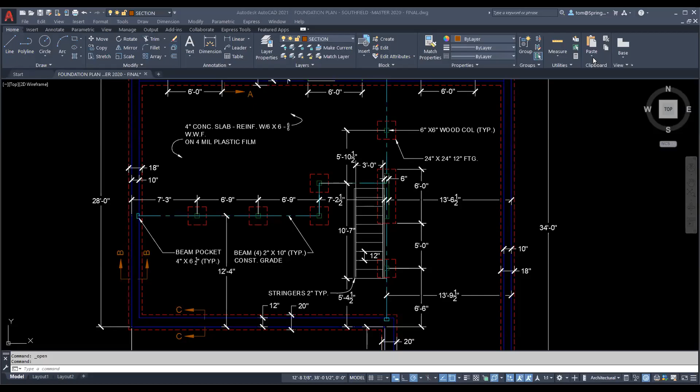Okay, can you guys all see this foundation plan here? Yeah, I see it. Okay, good, good, good. Alright.

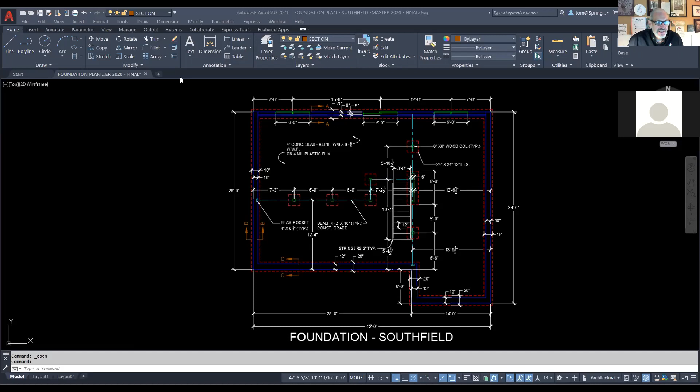How's your week been, Alex? It's been pretty good, how about you? Yeah good, I'm glad it's been good. Mine's been good, had a good week. Actually, we just finally finished closing on our building up north. So that's all good, we got all that happening, and that's a great thing.

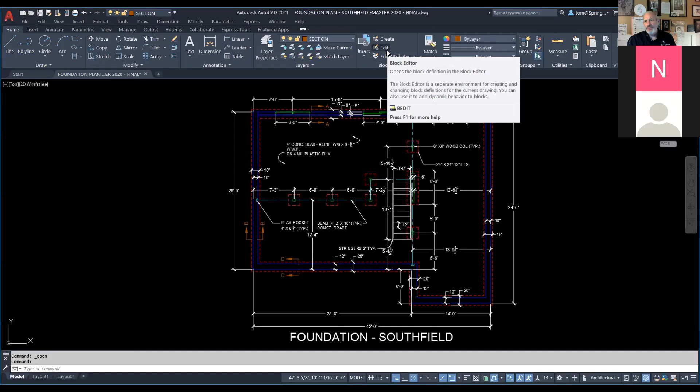Oh, is that the one in Clayton? Up in Clayton, yeah, that's a good thing. And so we got that all done, and it doesn't belong to us anymore. It's been the first time in like 16, 17 years I haven't had all that pressure. It's really kind of nice. It's nice to have it done, and money's in the bank, so that's all good stuff. It's nice to be a landlord, even if the tenant is yourself, but the business just didn't make any sense because of all the COVID stuff. Didn't need it anymore, so yeah.

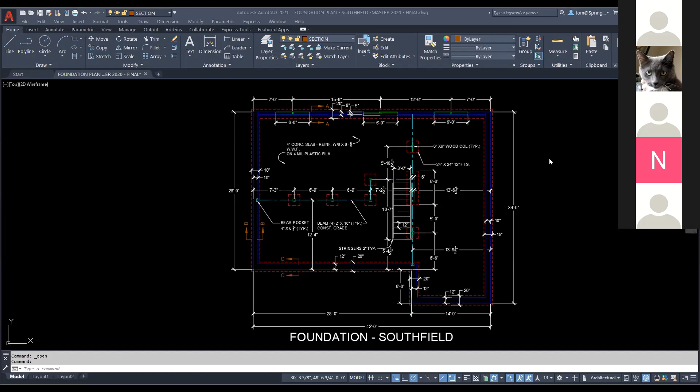Doing okay. I'm upgrading a PC because my laptop ran out of storage, so I can't really save anything. Well, save mine to a flash drive if you have one. Yeah, that's how I handle that kind of situation. Running out of room can be problematic.

How did the drawings work out for you? I think they're coming okay. Okay, good, good. And gonna move on to Shane. How's it going, Shane? Good.

Hey, good. Did you get that template issue worked out? No, it still says that I have an error. Every time I open it, it says error, and then it shuts down CAD. Really? All right, and so you downloaded the template. Yes. Now let me ask this before I go any further. Did anyone else have any problems with the template that I had there?

Oh no, I sent them all in. Okay, very good. All right, very good. And we're going to move on then here.

Let's see here. Ryan Morrison, I think Ryan's in here. And Eduardo, are you here today? Yes, hey, how's it going? Good, how's it going? Hey, going good. How'd the project work out for you this last week? It went fine. Just had a little trouble with the hatches because the Mac has a different way of doing it. Yep, there is a little bit of that kind of thing. So yeah, well good, sounds like you did well with it.

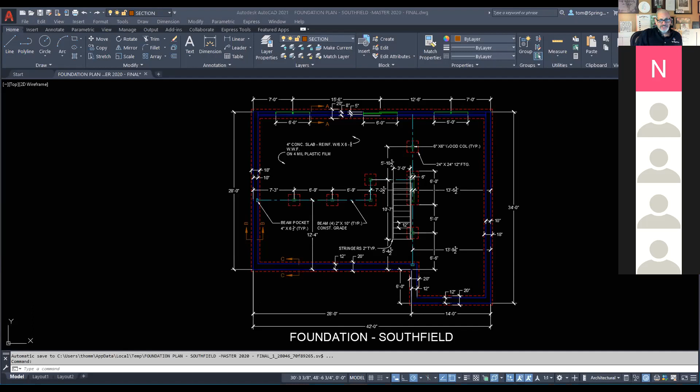So anyway, are there any questions about any of the projects you worked with last week? What I'm going to do right now is a different share here. I'm going to go over here... yeah, there we go. Can you guys see Blackboard right now?

Yeah, okay, so I'm going to go to Blackboard, going through what we went through here. Now, one thing I did not do is update the what's due when, but going back over here - today the drawing front elevation was due, and drawings I and J were also due. Those were originally due last week but I let those go, so those are due this week. We went over those last week. The drawing front elevation should have been done and submitted prior to us starting class at 6 o'clock.

Now tonight we are going to the next thing, which is the drawing foundation plan - again, same kind of thing. This is the only thing that's going to be due this week. This one's not that difficult, so this will probably be an easier week for you guys. If your workflow is starting to increase in your other courses, I am aware of that.

So what I try to do as I'm teaching this class - again, I look at this class, and typically it's not the main class for any of you. Most of you are taking other classes, so I look at my class as kind of a complement, an add-on. But it's an important add-on in the sense that if you really take this and learn it, if I can give you the skills I want to give you, you're going to walk away from here with something that will really keep you marketable.

And that's really the key. I tell people all the time, marketability is a thing. You want to be able to be marketable. In other words, people will give you money for what you can do. That's what marketability is all about.

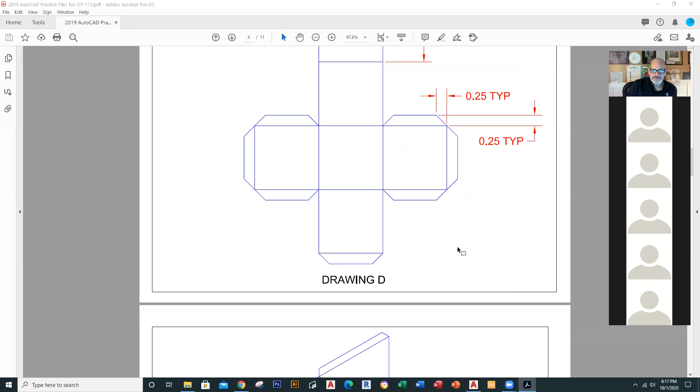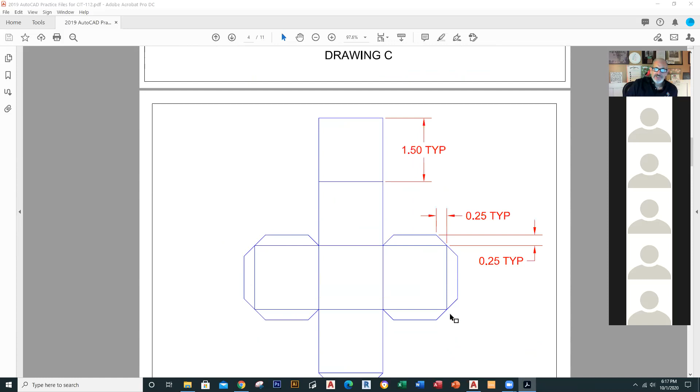And okay, can you see the practice files now? Yeah, yeah. So just reviewing what we did before. We did A, B, C, and D. And with C, the big thing was where we used going to the right is positive, going up is positive, going to the left is negative, going down is negative. We learned about that. Drawing D was a variation on that theme. Drawing E was similar. And then we got into drawing G, which is an architectural plan, and this one also used the coordinate values of negative and positive to get the roof slope in place. So we used that same convention. We did this one right here, drawing H, which was tying together everything.

This was using our offset. This was actually drawing circles and then trimming. And besides that, we also created fillets, and then we did a rectangular array, and then we did the mirror. So we did those in this one.

And then this one was again due tonight. This one was circular, started with a donut. And after the donut, we used the P line and we drew this together. That's how we went over that in detail.

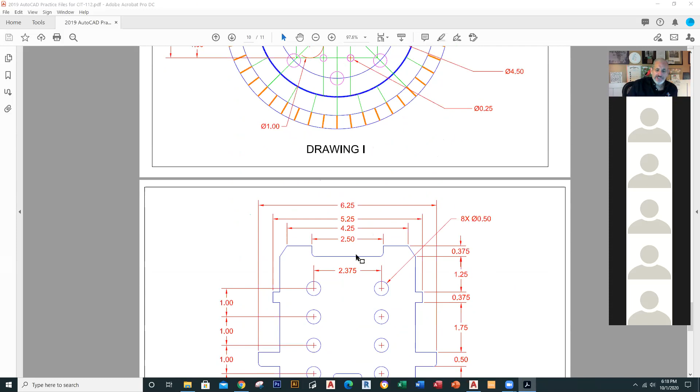And then we got this one right here, which again is not necessarily difficult in the sense of real hard drawing skills, but it's detailed. You got to just pay attention to it. There's a lot going on here. So anyway, that's what we've done so far.

So going on from there, what I'm going to do is I'm going to go back to here. Can you guys see Blackboard right now? Yes, you can. Thank you.

Okay, so what we're going to do tonight is we are going to work on the foundation plan. Now, the foundation plan is like this. What we're going to do is we're going to download the foundation plan master.

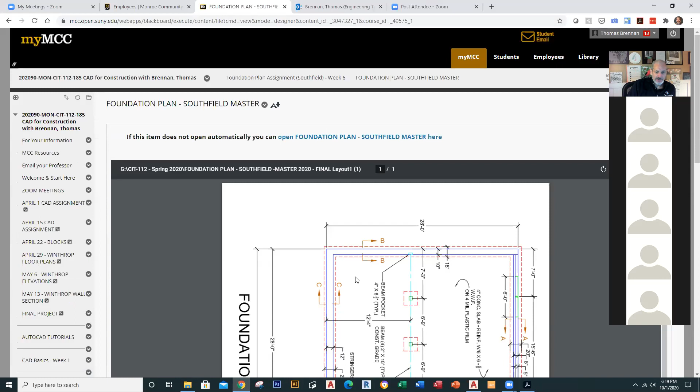What this means is the PDF, here. So what I'm going to do is I'm going to take this and download it. And when I download it, then I can just open it up. And so now I have this, open that up. And then from here, what I want to do is take that and flip it a couple times like that.

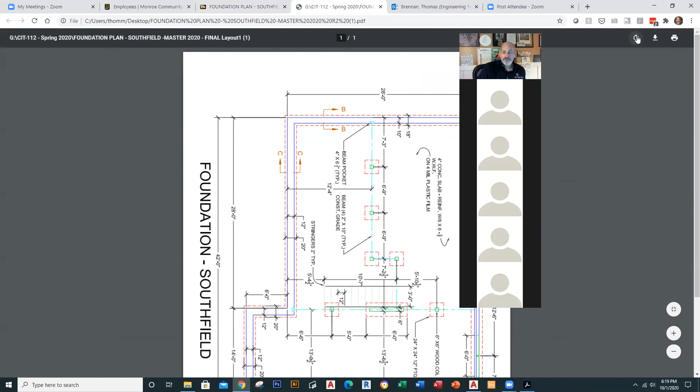Okay, this is what we're going to draw. So drawing this right here, there is a template for this one as well. So you download the template, and this is what you're going to start with. Now, this one, in a lot of ways, is just kind of a rehash of what we're working on, but there's different detail going on. Let me start to talk about what's going on here.

First of all, you have the outline of this structure. The outline of the structure is here, and the outline is available for us to go ahead and draw this. Now, what about this, let me do this real quickly. I'm going to zoom in a little bit.

Okay, so going into this, for instance, you've got this overall distance, which we know from before is 42 feet. We talked about that before, so you see it down here, it is 42 feet. And that is something that we just want to be paying attention to as we get into this. So down here, it's 42 feet. That's something that we've seen before. Then over here on the side, it's 34 feet, which is the same dimension that we talked about before. So we have those, the basics are there.

And you'll notice, please notice where that 42-foot dimension is drawn to. It's drawn to the blue line. So the blue exterior line is going to represent your outside wall. That's essentially what's happening right there.

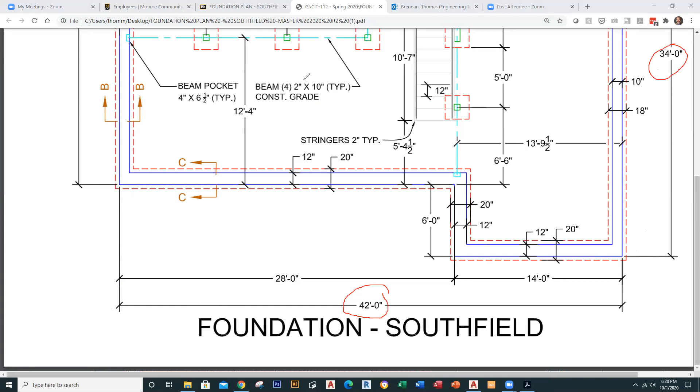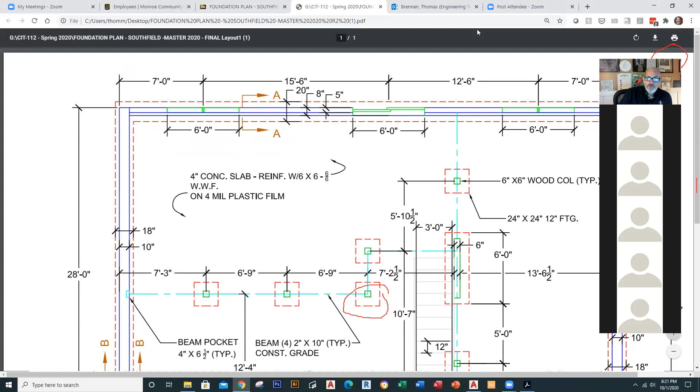So you have that going on. Okay, and that being the case, that is how we're actually going to roll. That's what we're going to go ahead and work with this, and that is how we can make this work. So let's go ahead and see if I can't do this. Okay, and then other than that, there's other dimensions along here that would actually be shared with the intent. Let me get back to here. Let's get back to here. All right, let's go back to this.

Okay, can you guys see this floor plan, this foundation plan again? Yeah, okay thanks. Okay, so what we got going on here is there's a little bit of confusion going on here. Every dimension you need is really on here though. It should be, I've gone through this a few times. It should all be there. So there's a few things going on.

First of all, you're going to notice that over here, you've got a 7-foot dimension. That is where the center of this door is situated. That's where the center of the door is. So that's one thing, so you got that. Over here, it tells you it's adding these dimensions up. So 22 feet 6 would be the center of this. And I've actually got some blocks in there that represent those. Then you got a few other things going on here.

You got actually a dashed red line. Did anyone have an idea what that dashed red line might represent?

Is that a wall? Footing. Well, it would be a concrete footing - essentially the foundation under the exterior wall. So that's what that is right there, and down here we'll be detailing that. That's what the dashed red line represents.

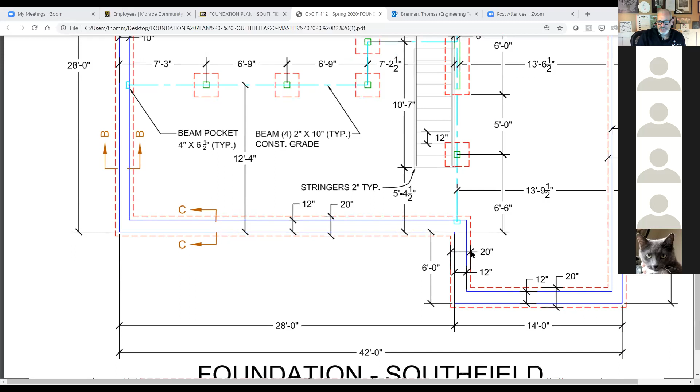Now I want to point something out here. I did this deliberately, because this is how construction documents sometimes are. You'll notice the outside blue wall is 12 inches, and outside here it's 20 inches. Same for right here. But going up here, the wall is 10 inches and 18 inches here. It changes, and up here you've actually got three widths.

You've got a 5-inch wall, which is the outside wall where you'd walk out - like a basement walkout type thing. So you've got a 5-inch wall, your standard exterior wall, on top of an 8-inch wall, which is on top of a 20-inch footing. That's what you have going on back here. The back of the house is right here.

So you have those different things going on, with a second blue line showing that distance. Then over here you have 10 inches and 18 inches on this side. Then you have some offsets that tell you where these green items are - these green items are wood columns holding up the structure.

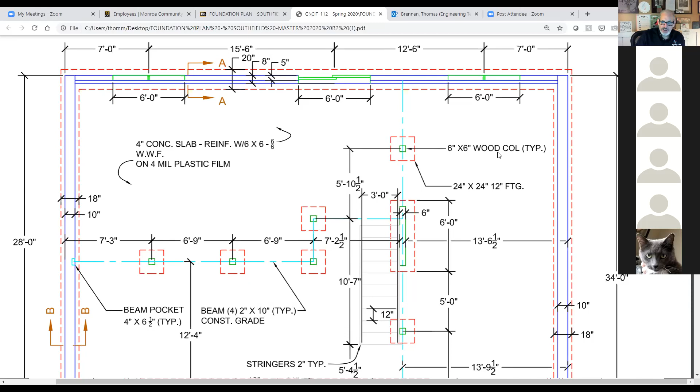And those would actually be like wood beams - wood columns, kind of like a wooden I-beam. Essentially it's there holding up the support structures right there. And those are also sitting on footings - the dashed red line represents footings. So that's what you have going on here.

It's not a real difficult drawing, but there's a few things I want you to understand. First, the size of these wood columns is right here, and it tells us what they are - 6 inches by 6 inches. That's the size of the wood columns. Then you'll notice the footings are 24 by 24 inches, and that's a 12-inch footing - even that's how thick it is.

So that means you've got 6 inches right here, and 24 out here. Going out to this side, the overall dimension is 24, and the overall of these is 6 - so they're concentric, they fit inside each other. That's something that'll help you as you're drawing along to place these.

Down here, this particular feature is essentially an elongated footing with a long wood column member in place right there. It's a long column that's been put in place, which is the device used in this drawing. That's also 6 inches, and this one is spread a little bit longer. Those are some things you'll be looking out for as you move along.

Over here there is a section line. A section line indicates where a building is cut - that's something you guys probably know about. It indicates that if you were to slice the wall right there, facing in the direction of the arrows, that would give you B. The same would be true up here for A, where it's sliced to give me A.

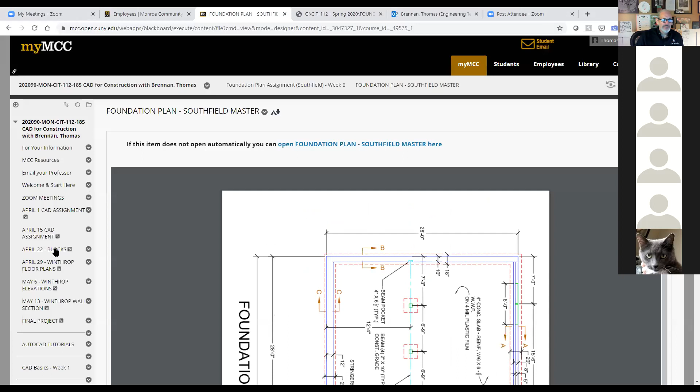Okay, so the wall section, this is what you're going to do next week. The wall section looks like this. Let me show you this now.

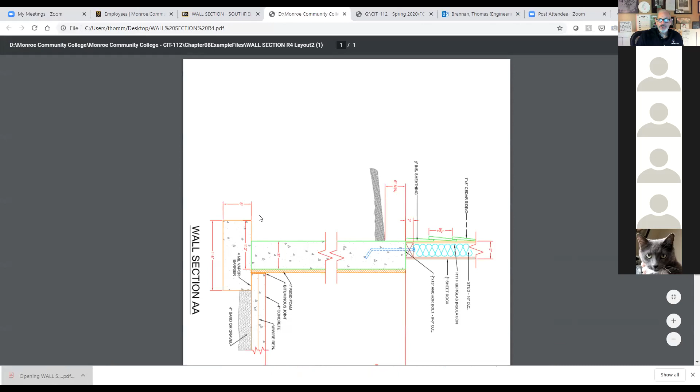So what I've got here, I'm going to take this and go ahead and download that. We'll download this and open it up just so that we can see it. Now what we've got going on right here, as I open that up, I'm going to flip it around here like that.

Now this is actually what you got going on here. This is wall section AA. So the AA notation is the section line reference. The section line that said AA is actually slicing the wall, and this is what you would see on the other side of it.

I actually took some liberties with this, so don't worry about it. I put some things in extra here. It's not completely accurate to how it would actually be, but that's okay. Just accept it as it is right now. We're going to just leave that alone. I just wanted you to see a little bit more. So it's not a perfect example, but it's the basic elements in there.

So anyway, what you have going on here, if you were to slice that wall, you would get section A, which is a 20-inch footing right here. And then you have right here an 8-inch wall. Then you have up here a 5-inch wall. So that's actually how that is sliced. That's what's going on right there. That is what you're looking at when you slice the wall.

That is a section. This is going to be next week's assignment. So this wall section is going to be next week. So that's what we have going on there, just to explain what's happening.

So let me go back over to here and make sure you guys are clear on that, okay? Because we're going to make sure that that is what we're all seeing here. So we'll go back over. Let's see here. Back over here. No, let's go back over here. Okay, and I guess got to go here. So we'll go to here. We'll stay here, and we will continue on over to here.

Can you guys see Blackboard right now? Yes, I see the plan. Okay, can you see the foundation plan again right now? Yes. Okay, great.

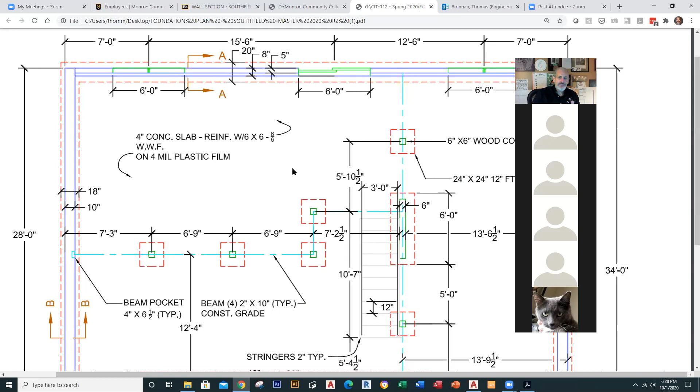So anyway, that's an introduction to where we're going with this. And again, the whole goal of this right now, the name of the class is CAD for Construction. This is how construction documents go together. It's a simplified version, but essentially every building you're ever going to work with is going to have essentially some collection of what we're looking at right here. So let me show you how we do this.

Okay, so right now, around 6:30, I think we might be a little bit shorter for the lecture tonight, which I don't think any of you will mind. And so we're going to go back here to AutoCAD. I'm going to start this up. And this is what it's going to look like when we're done. Okay, this is what it's going to look like.

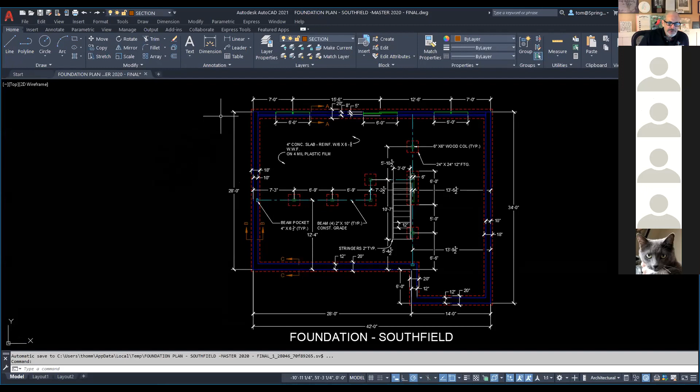And this is the file actually that I made the other one out of. So there's a couple things in here that are a little bit congested. And I should probably break this out with a second sheet, but I was trying to not overload you guys, so I didn't make another sheet. But this is what it's going to look like. So let me back out here and let me show you how you do this.

So you got this. These are the basic elements that you're going to have here. So these are the layers right here. You've got these different layers here. You're going to basically have your walls. Your footing is going to be a dashed line.

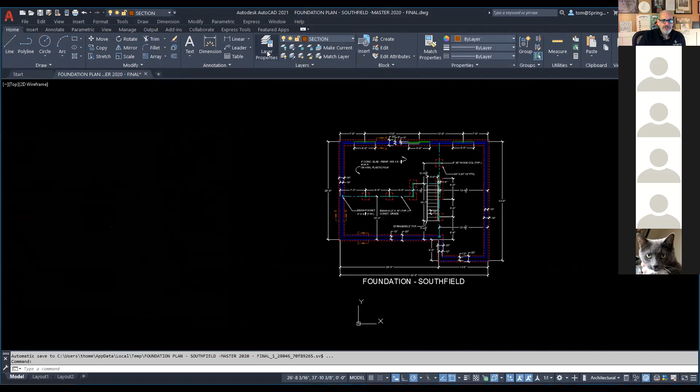Let me show you something here. To show you what the layer properties look like here, we talked about this before. You're going to notice here that your hidden line right here is your footing line. Your footing layer is red and it's hidden. Hidden means it's a dashed line. That's what hidden means. Over here, your beams, that is using a center line type. So your line type is something that AutoCAD uses to distinguish the actual lines you're drawing and identify them with a certain function. So a center line is essentially going to be that.

It's where your beams, your wood columns, are all centered on that center line. And then your footing is going to be a hidden line, that's going to represent your footing. So that's how that goes. So that's what your line types are all about.

So you just want to pay attention to that as we go through here. The other thing I want to point out is you've got a block here for the sliding door, which is right up here. Now, I'm going to pull this in here. You're going to notice that its insertion point is at its side rather than the middle, so that's something you're going to have to work with a little bit. This one too, this one also has that, and that one does the same thing.

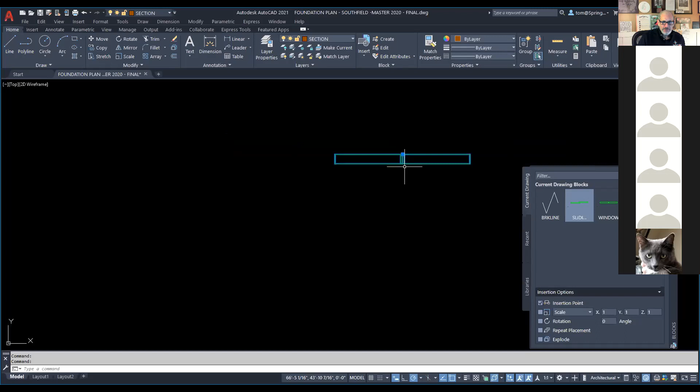So this one, you click on this one. This one has the center as its insertion point, which makes life a little bit easier because up here you can see that it's dimensioned to the center. This one goes to the side, so you'll have to figure that out, you'll have to do some math. Okay, that's just how that works.

So getting rid of these, you don't need those right now, but that's just showing you what is actually in this particular template. So we're going to work with that.

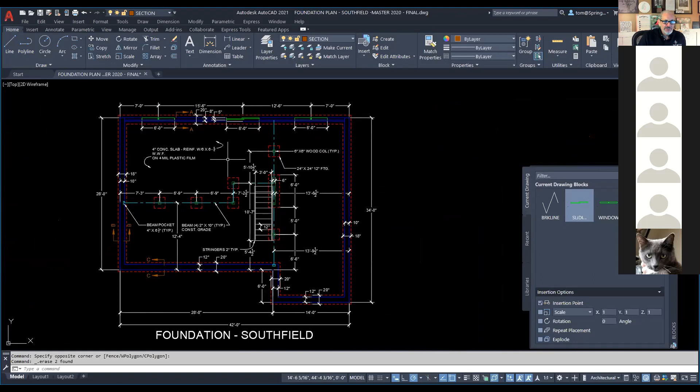Okay, so how do we start? Well, we start like we always do. First of all, Mr. Brennan gives you templates, okay? So you always want to make sure you use the template.

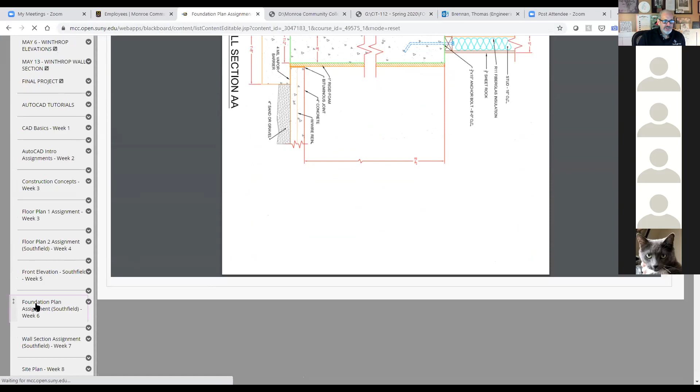So I'm going to go here and grab that, pull this down here, and share this over here, which I think will work. Yeah, there we are. And then over here, what I want to do is on this particular week, which is week 6, I'm going to go to here, and you're going to see that right here, if it'll come up. All here with week 6. Hopefully that won't crash on me. Come on now.

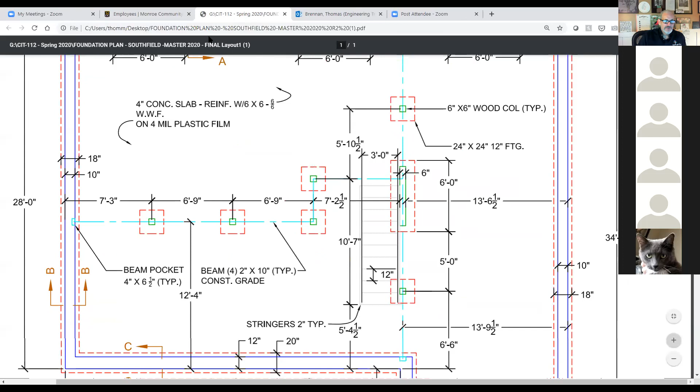Okay, let me close this. Let me close that too. All right, so I've got this right here. Okay, and then let's see here. So I'm going to go back. Okay, all right, so I'm going to go here. Just gotta do this.

Okay, so back over here to Blackboard, and that comes up here, and we're going to go to week 6, foundation plan. Okay, and this is where the template is. Foundation plan, Southfield template. I download this, and it's going to download it here. So that goes to my download.

So that being the case, I'm then going to go here. I'm going to go back to AutoCAD. I'm going to start a drawing using that template, so we'll do that. I'm going to leave this one up here. I'm going to go to the application menu, go to new. You always want to do it the same way.

And then we're going to change our particular location to be out here. So we're going to go out here, and I'm going to go to my downloads, that's where I'm saving it. And in the downloads, I'm going to go to the foundation plan, which is right here. I'm going to grab that, and that should actually be in place.

You know what, let me change that though, because I think something might have changed. So let me just go ahead and make sure, and do the same thing I did before. Downloads, okay, and I want this one right here. Yeah, that one should be the same size, but I'm not sure. So looks like they are. But I'm going to use this layer one.

Okay, so once I get into here, what I want to do now is I got my walls layer right here. Is that the right one? No, that's the wrong one. I used the wrong one. Okay, so let's get out of there. And I want the foundation wall.

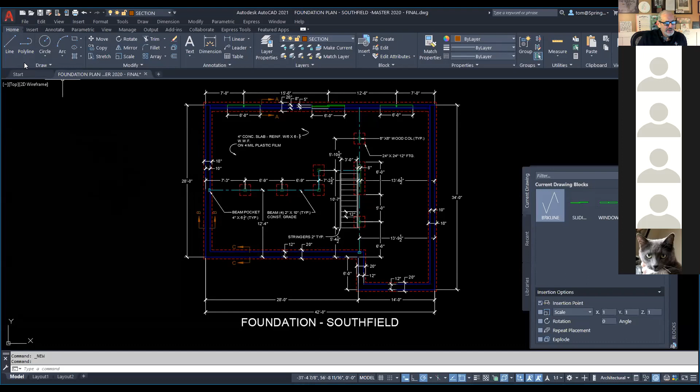So back to AutoCAD, make sure I'm doing this right. The old saying is measure twice, cut once. Measure once, cut twice, so that's what I'm doing. I'm doing the measuring by checking. So I'm going to go to new, make a new drawing, back out here to my downloads, and I want to make sure I use the foundation plan.

Foundation plan. Yes, that should be correct. That's the right one, I hope. Huh, looks like I put the wrong one out there. Dang, all right, yeah, I did.

Maybe it didn't. Oh yeah, you know what I did? I actually changed the color for printing, I think is what I did. Let me look at my layer properties. Yeah, we got hidden here. Yeah, we're good to go.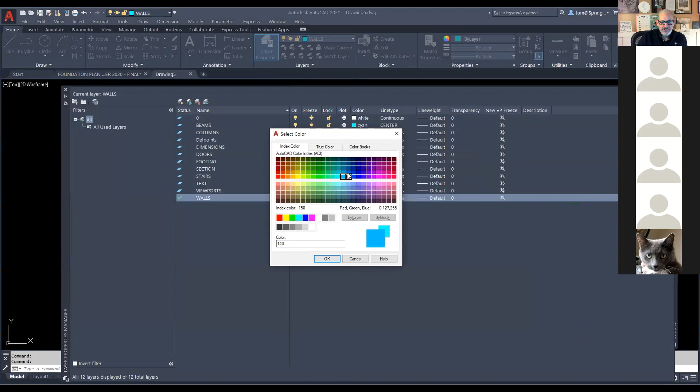So the reason I changed the color of my walls here was so that you guys could see them easier. By default they were blue. I'm just going to compromise and use a little darker blue here. Okay, walls, my current layer, we're good to go. No, everything's fine.

I did it right. Okay, so now what we're going to do is draw the exterior. Now the exterior, we talked about this before, and if you have a consistent wall width, you can simply offset them. But we don't have a consistent wall width. So what I'm going to do is draw the walls with lines, and then offset those and clean them up later.

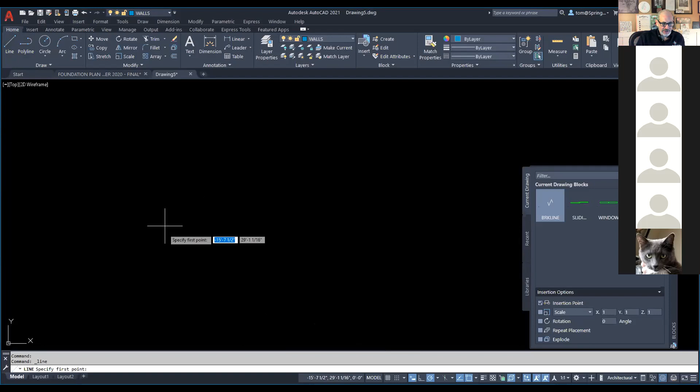So I'm going to use my line command. I'm going to start with this back one right here, which is going to be 42 feet. And I'll say 42 feet like that. And then down here, 34 feet. Okay, and then over this direction, 14 feet. Okay, and then back this way, 6 feet. Okay, and then back over in this direction, 28 feet. Okay, and then we should be able to close it.

So I right click and choose close. Now at that point, I've got this in place. Let me make sure it's correct by putting in my dimensions. Again, in my first prompt, I can hit my enter key and verify that I'm there, and then I just pick the line. So at the first prompt, you right click or hit enter and you can actually get these dimensions like that. And that's how we can rapidly check and verify we got them all together.

So you know you don't want to build on a bad foundation, you always want to make sure you dimension it. So we're ready to go. Now my front wall gets offset. Actually the wall there, that's a 12-inch wall along the front, so I get my offset distance for the front is 12.

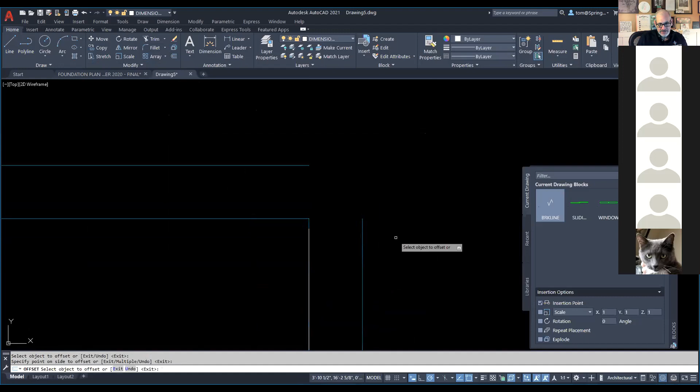So then my offset command, which is right here, offset and type in 12. I'm going to offset this one, yep, like that, and then this one too. Now this one, I'm trying to find this. Okay, well we find that, so I'm going to grab it here, over that. Okay, so got that. And you'll notice right there that my lines are all crisscross. Don't worry, I can fix it.

Now my side walls, they have an offset of 10 inches. So this offset again, and use 10 as my offset for the sides, so these get offset from the sides. And then my back wall is offset a total of, let's see, 20 inches - actually no, 8 inches for this one. So this one's 8 inches, offset here, 8, and we'll go ahead and do 8.

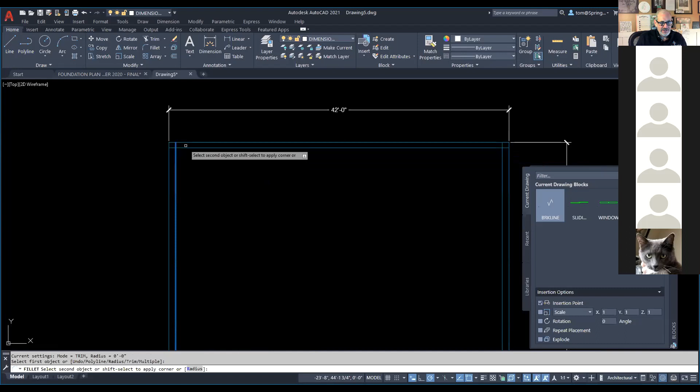Now once we've done that, we got the basic wall right there, and that's what we'll do. And then I can just use my fillet command, and I can go ahead and start to clean this up like this. We talked about the fillet command - if you use fillet command with a 0 radius, you can just use it to clean up your corners. So fillet is a fast way to do this. I'm just cleaning this up. This is a little trick that helps you to quickly do cleanup in AutoCAD if you need to, which I'm doing right here.

So once I've done these, I've got my corners cleaned up and we are good to go. That was using the fillet command.

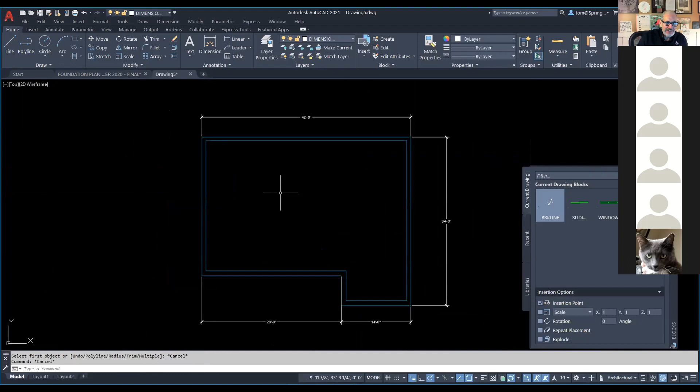Okay, now that I've done that, I want to check my distances and make sure they're accurate. So let's go here. This one over here should be 10 inches. Go here to here, and that's 10. And I want to go up here, and this one should be 8. Here to here, and this out of the way here. Come on, you. All right, and there, that's 8. And the front one should be 12.

And it says 1 foot, which should be correct. Okay, one foot, which is 12 inches. So we're good to go there. Okay, so we got that, and now we are good to go.

So now that we're in here, looks like I have to change that dimension to be something different. Because, by the way, you see that right there? It's saying 1 foot. It should say 12 inches. So I'm going to right click here and change the properties there. What do I need to change in the properties?

So this is just kind of a quick thing. There's a standard, let's see what I want there. Would that be my dimension style? Yeah, I thought I'd fixed that, but I guess I didn't. So we could use that as my units. And so my units here, let's see, units are architectural. Let's try fractional, yeah, that'll work.

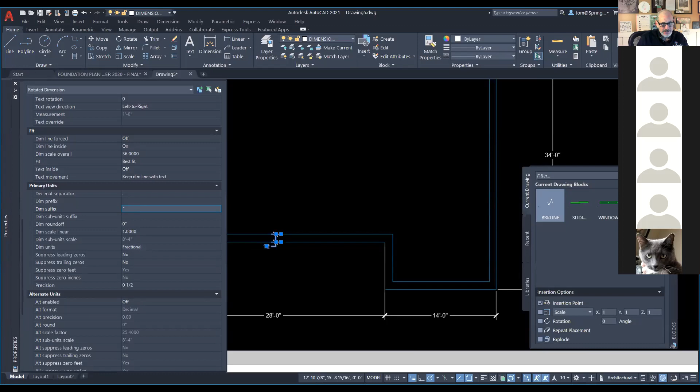So fractional, and with fractional I want to put in a suffix, a dimension suffix of inches. That way I'll put in the inch mark. Okay, so go ahead and do that. That's just one way to go about doing that. There's more than one way to do this, but that's just how I did it there. So I did the 12 inches there, we're good to go.

Okay, now the next thing I have is my exterior, the red lines that go around the outside. Now, how would I do that? Well, you just have to—let's consider the line over to the right side. I'll go ahead and show you this real quickly, and we can talk about how we do this, because there's always more than one way to do this.

So if I go back out to here, and share this, going back over to here into this thing—let's see, not this one, we don't want that one, one back here. Okay, can you guys see the foundation plan right now and the PDF with the white background? Yes. Okay, so what you've got going on right here is you'll notice that 10 inches is my wall, 18 inches is my dash wall.

So how far would I offset each of those dashed red lines from each surface? How far would I offset them?

18 inches—well, it's 18 as the total. You've already got 10, so you need 4 inches on each side. So you'd offset each one 4 inches. Follow me? Yeah. Okay, but you're right, 18 inches is correct. Thank you for saying something, I appreciate that. And you're correct—to get the 18 inches, I have to use a 4-inch offset for each one of those.

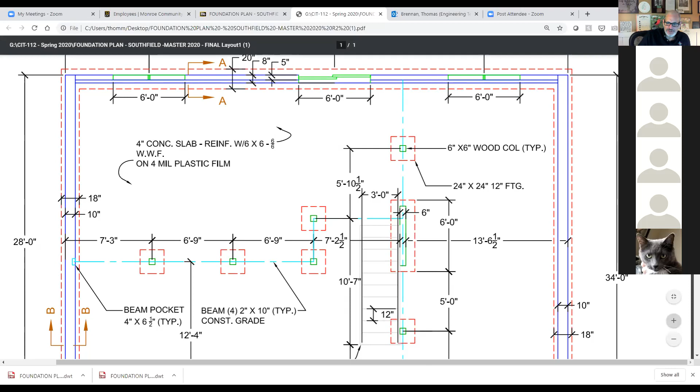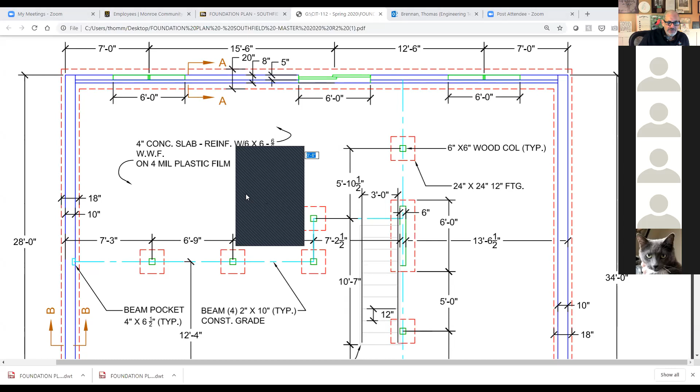So I can do it this way. Let me show you how I do this. There's a couple cool things I can do with the offset command here. Now I'm going to show you something that's kind of an aside—not something you have to do, but I'll show it because some of you will say, 'Wow, that's really cool.' Notice that in the offset command down here, I have a few options: through, erase, and layer. So what I can do is go to the layer option. I can right click and choose layer. Okay, so I've got layer right here. What I can do is enter the layer option.

I can't really see your screen. I don't think we can see it. Well, okay, we're back here. Let me go back to here. Okay, let me go back to AutoCAD. So back to AutoCAD, let me show you guys. Got that, thank you very much for saying something. Back over to here.

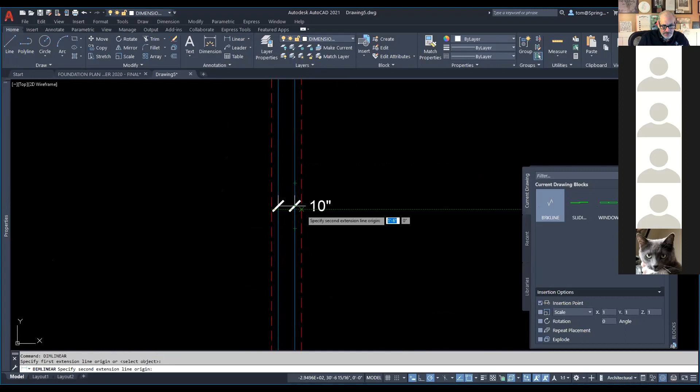We'll go from here, let's go over to here. Go from here over to here, boom to boom. Okay, and that's 1'6" — yep, that's correct. And then that's actually correct. And then this one would be correct, and this one would also be the same thing.

So I'll go to here and to there, and we have that. Okay, so I have those, and those say 1'8". Okay, and that actually should say 20, but that's okay — we know how to fix it.

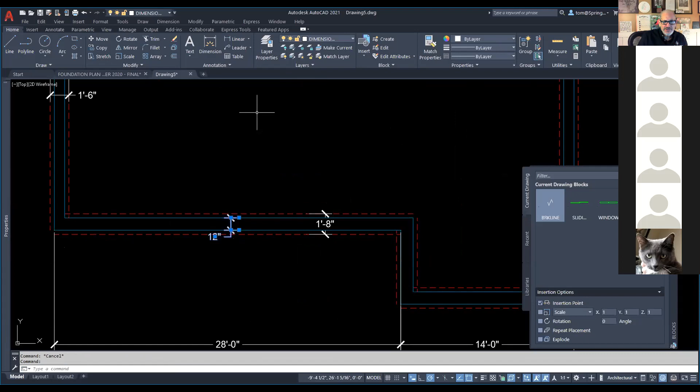What I can do here is copy that property by going here and using my match properties. If I use match properties, see that? It's a quick way to go ahead and change all these so they have the correct values. It's this little paintbrush here — it says match properties. You click on it, and then it allows you to change these values as you see me doing right here. So I have that happening, and that's a quick way to make that quick change.

Okay, so I've got the basics right now. That's all the basics right there. Any questions so far? Nope.

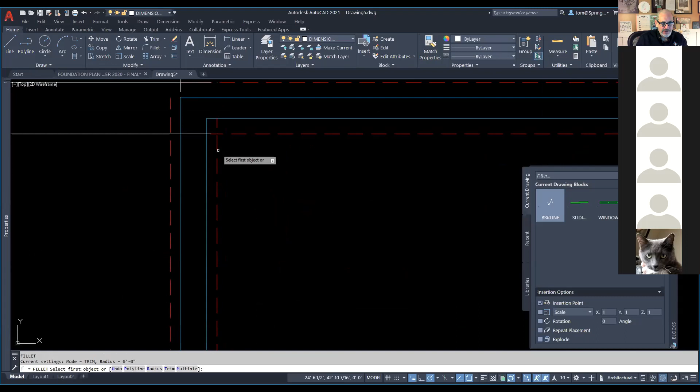Okay, now my corners — you know how to fix those, I just use fillet like we did before. And we use this to go ahead and do that, boom to boom. And then we do this and go to there like that, and we go ahead and just make this all work like this. As we go through here, we're able to clean these up.

And I'm going to make this multiple, so I have to keep hitting that. This is how you just go ahead and do it. With AutoCAD, it's very flexible, but it's going to make you do a lot of this detail work. Like, for instance, when we get to Revit, you won't be having to do this kind of thing because Revit automatically cleans it for you.

AutoCAD doesn't clean up after itself, you gotta clean up after yourself. All right, so here we go here and there, and I think I got one more. Hopefully this is making some sense, okay? This is something you guys will see in real life, you will actually be doing it. We go like that. We are good to go, so we got that.

Now that we have that in place, the next thing we're going to do is put in the dashed lines for the beams. Dashed lines for the beams. Now the beams actually have some notation here.

So let me save this, by the way, before I forget it. Save as to the desktop, and this one I'm going to call it Foundation Southfield with my last name. All right, that's how it should look.

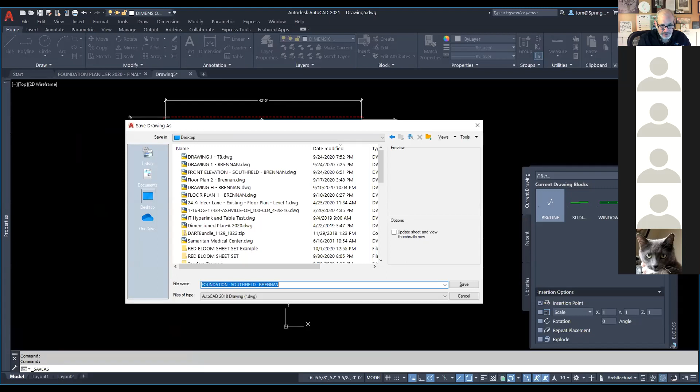Now that I've got that in place, the next thing I want to work on is how far apart these things are. So let me go out here and take a look at this.

Can you guys see this white background foundation plan? Okay, thank you. So what I want to do now is put in the center lines. The center line right here goes right across, starting from here, 12'4", and it goes all the way over this distance. So I can just draw one straight across if I want to.

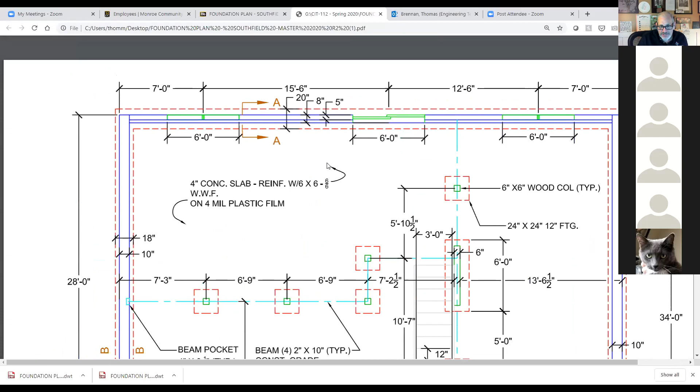And then I have another one right here, and this one is 13 feet. Where is that one? 13 feet, 6.5. Actually, but what does it give one to the actual outside? No, I didn't give you every little dimension here. I probably should have just to make it easier on yourself, but actually I did - 13 feet, 9.5 for this one. So 13 feet, 9.5, and then over here, it's from the bottom, that's 12'4".

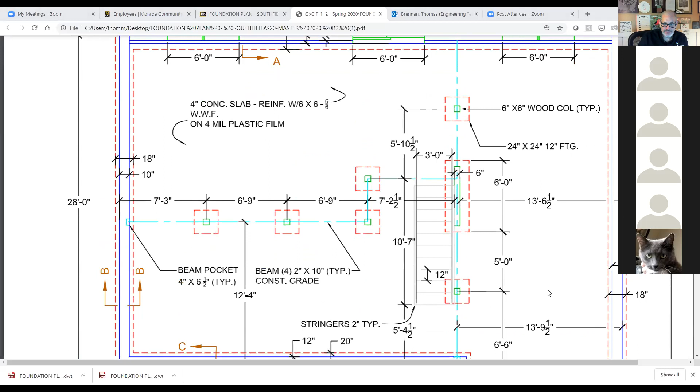So I'm going to start to put those in. To do this, I'm going back over to AutoCAD. I'm going to go to here, and switch to AutoCAD, which should be this one here. Can you guys see this okay? Can you see AutoCAD with the black background? Yes, okay.

So I'm going to go ahead and put this in. I'm going to change this to be my beams layer. I'm going to offset this layer - this one's going to be 12'4". So offset 12'4", and that one's going to be the outside, right to here. Boom, okay, so I got that.

Now the next one I want to offset is actually going to be 13 feet, 9.5. So we're going to go ahead and go over here, 13 feet, 9.5, over here, 13 feet. And I'm going to change the distance, 13 feet, 9.5, boom, and that goes like that. Okay, so that's 13 feet, 9.5 going from the outside. So we're good to go there.

And then the last one that I have there, actually let's see here - that one I actually have to kind of look around a little bit because I've got the basics right there. And then I've got this other one that is, let's see here, 1, 2, 3, 4. Yeah, okay, I can just do it that way. So what I'm going to do now is start putting in my columns and so forth.

So my columns are actually here on a layer called columns. Okay, they're dark green. So what I'm going to do there is it's 7'3" from the outside is the size that I have here. I'm just going to use my line command, just use the lowly line command. I'm going to go ahead and go from this particular wall right here, over 7'3".

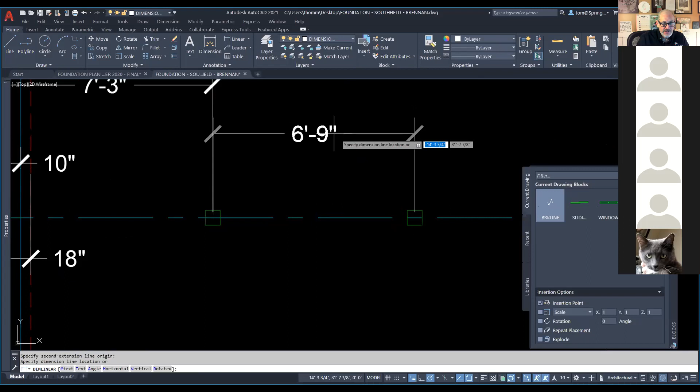And then I want to do another one, copy another one, 6'9". So repeat copy, grab this, and this one's also going to be 6'9". Boom. And by the way, the sound effects are optional, you don't have to do those, it's something I just do, I don't really think about it. So go there, and we pull that up. Okay, 6'9", you got that there.

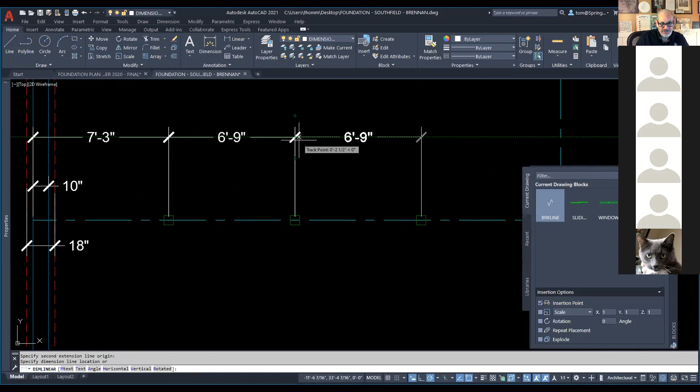Okay, so what I've got there is I got my row of columns started here. 7'3", 6'9", 6'9", and then the next one would actually be going up. I've got that dimension somewhere, at least I should. I've actually got these kind of placed all over the place. Let's see, here's a 3 foot. I know I've got that dimension someplace.

Okay, the next one I got to do a little adding up here because I kind of put it down in pieced off dimensions, but that's okay, that's life sometimes. 5'4.5", 10'7", and 10'7" again. So that would be 15 feet, 11 and a half. If you guys want to jot that down, it's going to be 15 feet, 11 and a half to get that last line, coming from this line.

So let me do that. I'm going to go ahead and make this my current wall right here. I'm going to do another offset here, 15 feet, 11 and a half. So I'll say 15 feet, 11.5, boom. I'm going to use this as my distance here. We'll click there, and then up there, that's where I want it to go, right there. Perfect, and that's the line that I need right there.

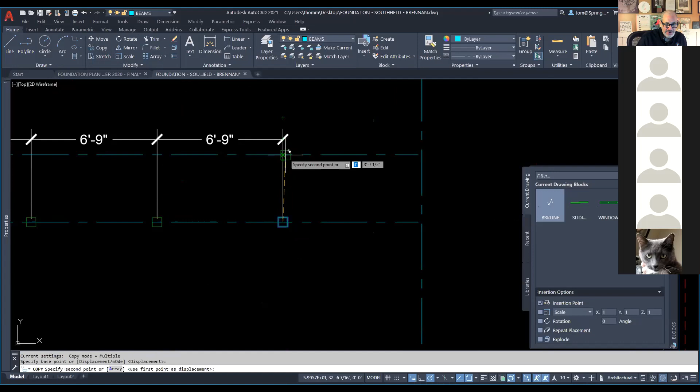And then the last one that I need is to copy this one up to there to get this all going here. And then I'll show you what it's looking like on the other one, so we can compare, make sure we are where we're supposed to be. Go ahead and drag this up to here, boom, we are right there now. So now once I've done that, go back to here, make sure it's back to where it should be, and we go to here.

There we go. Okay, now at this point, I've got that distance right there, and let me measure it, make sure it's accurate. That should be 15 feet, 11 and a half. I'll go from here out to here, make sure that's right. 15 feet, 11 and a half, correct. So I got those, and once I've got that in place, I can put that in the dimensions layer. That one I'm not going to need ultimately.

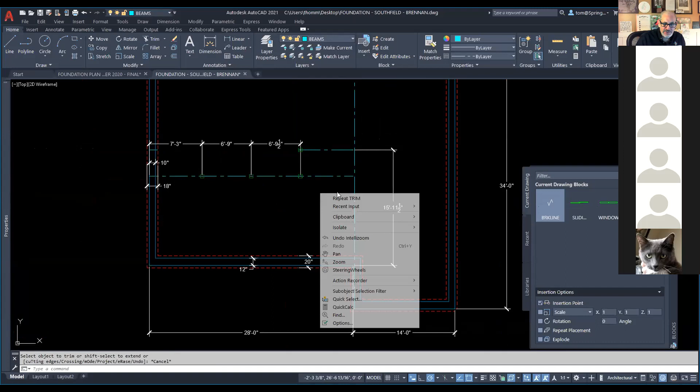Now, at this point, I can do a little bit of trim work. I can trim this one out right here, I don't really need that there anymore. And I don't need, let's see here, what else do I not need here? The rest of these, yeah, I don't need this one either. So I'm going to trim this one over to there. So I've got that, now it's starting to clean up, we're starting to look like something. We're good to go.

And then I would need one more here, so I need to put in one more line here. So my line will go from the center of this one.

And I can go ahead and touch these 2 points to get it. And we'll go from there to there, and then we'll go up, and then we'll go ahead and plant it there. It looks like that one missed by a little bit.

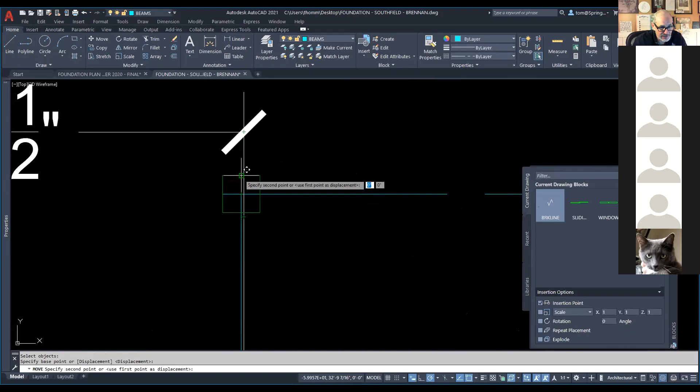So I'm going to move it over. You want to make sure these things are exact, because as the old saying is, close only counts in horseshoes and hand grenades. So we want to make sure we get them accurate. Okay, let's see, so that's 6'9.5".

Yeah, that's why. So that one got jostled a little bit, and we'll go ahead and put this back to there like that. Okay, so a lot going on there, and that's what we have happening there, and that is all good. Okay, so now that we've got that, we could do some cleaning up there, but we have the basic elements.

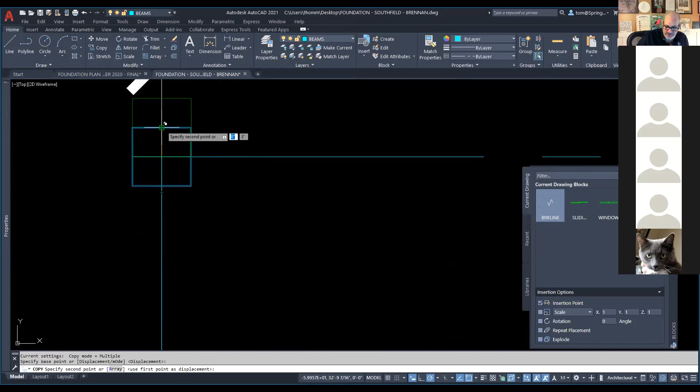Now that you have that, there's also going to be over here, now that we've got these in place, the next one is, there's another one that's 5'10.5". That's on the other one. So we're going to go ahead and copy it 5'10.5" over. So we'll go ahead and go here, and we'll go right from the center, and we're going to say 5'10.5".

All right, let's see here. Yeah, so 5'10.5", 5'10.5". Boom. Okay, oh, there it goes. Okay, so there's 2 of them there. Okay, and then I'd move that over. So I'm going to move it.

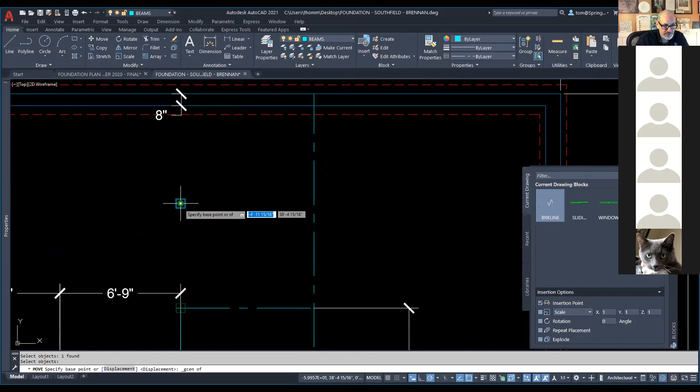And I want to move from its geometric center. By the way, that's an object snap that you guys can use here. That's helpful, geometric center of this, and that way move it straight over. Little helpful thing there. Then I can get rid of that. Okay, so got that. Now at this point, that one should be all set there.

So I'm going to measure that last one. That should be 5'10.5". So let's verify that it is. And again, we're going to go from the geometric center of that to the geometric center of this.

Come on. Yeah, 5'10.5" right there, which is exactly right. So we have that right there. So everything is looking quite good. So getting these together, I'm just putting these in so you guys understand that the dimensions are there. I didn't make it obvious, so that's the only thing.

Now the footings are 24 inches by 24 inches, so I can do this a couple different ways. I could just make a footing and make it 24 by 24. So I'm just going to do it that way. I'm going to go ahead and use my rectangle command, and I'm going to go ahead and just make it 24 by 24. 24, comma, 24. Boom. And then what I'm going to do is use my move command.

I'm going to go ahead and move it over, and I'm going to move it using its geometric center. So I'm going to start with this. All right, and then right click and use my geometric center right here, right there. Then I'm going to use the geometric center of this. All right, right there. So once I've got that, that's it right there. That's the size of those right there.

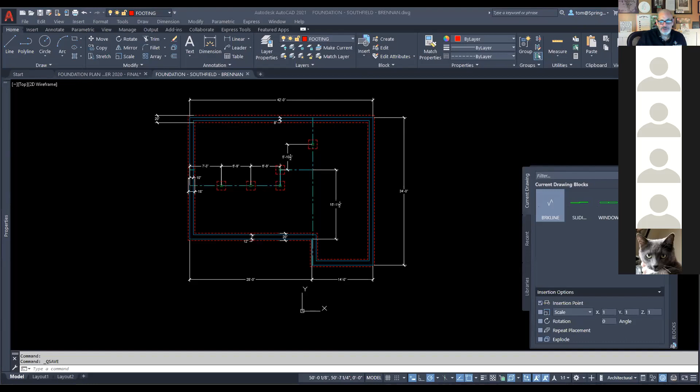Okay great. Now what I need to do is add these dimensions up right here to get to the end. I want to draw this now because it's the only dimension given to me. So that would be 6'6" plus 5 feet plus 6 feet, so 12'6", it's 17'6" from here. So 17'6" from here up to here is where that starts, the footing.

17'6", so that's what I'm going to use, coming from here. So I'm going to go ahead and use that particular measurement. And again you got to do some simple math. Let's see here, go here, share this. Okay, so we'll go here and we're going to go 17'6".

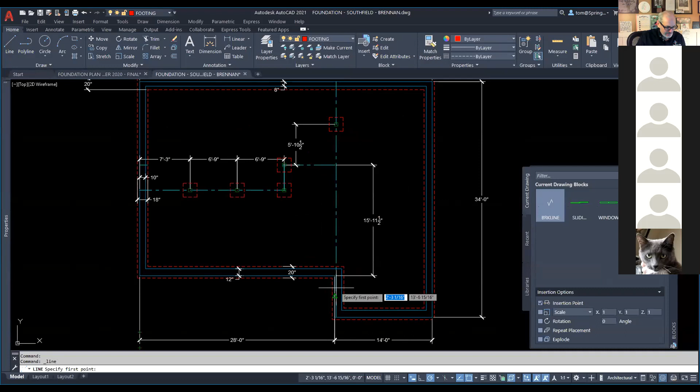And that will give me the footing. So I'll start with my line, and I'm going to start here, and we'll go 17'6", boom, like that. Okay, and that is actually where this one starts. So once I have that, I'm just going to draw a line right there just to get that going, because that's my marker. That's really all I'm interested in. I'm not too worried about this.

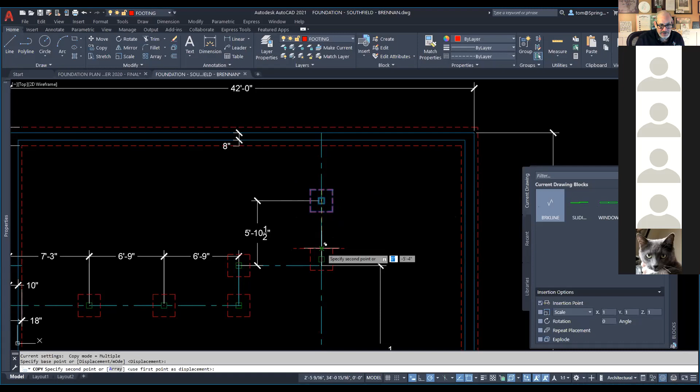Okay, so I've got this, and I'm going to take this and pull it over just to give me that. Now at this point I've got a pretty good idea as far as what I need here. I'm going to grab these elements and use this, drag it down to this point there. Make sure that we are where we should be, like that there. And then I'm going to just extend it. Okay, so I've got that.

And then I'm going to go ahead and pull this bar down. How long is that? 6 feet. So I'm going to click it, drag it here, and pull this down a total of, so it's already at 2, we want to pull it down another 4 feet. So 48, there we go. Now that should be 6 feet if I got that correct. I think I do, let's check it. This should be 6 feet, and it is, so we're going to go there.

All right, now I'm going to put it on the dimension layer right there. Boom. And then the other thing I've got is this one right here, same kind of thing. Since that one's there, I want to drag that one down since that's 6 feet. It was in the front on each side. What would this be? Oh gosh, I don't know, 3 feet, 4 feet maybe? Let's check again. Yeah, I think that's about perfect. So that's 4 feet, okay, right there. So that's 4 feet right there, and I think we are good to go there.

So that's actually how that should look. So at that point you have that long footing with the wood column type element on top of it, and that's pretty much how you put those together. And then you can dimension those off to get those in place.

I've got one more down here that has to be placed, and that one is actually at 6'6" from the corner. So I'm going to go ahead and put that one in place. 6'6", I'm going to start from this point here, 6'6" from this right here. Yeah, and I go 6'6", 6'6", boom, like that, and I'm going to go ahead and do that.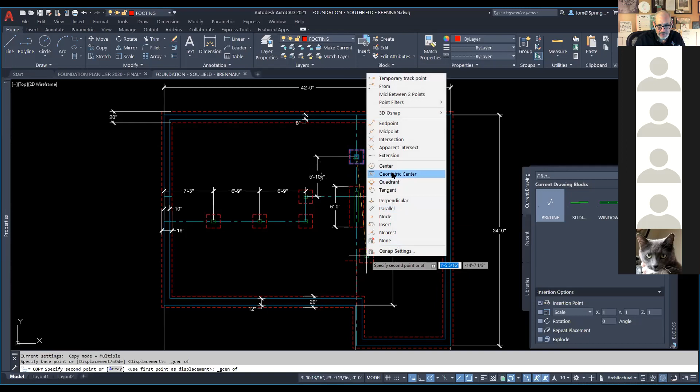And then I'm going to go ahead and copy this other one up, copy this one down here, because that's got to go. And then that's going to be 6'6" to the center, so run geometric center again. All right, to the geometric center. That'll work. So we have that, get rid of this, and get rid of this. Okay, there we go, and so we have that in place right there.

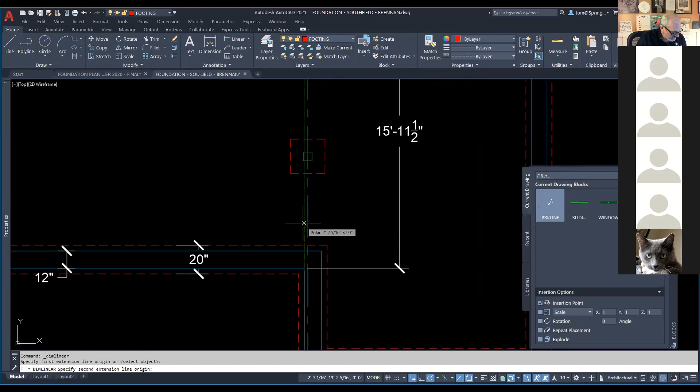So now that we have this right here, all of our columns are in place. You could go ahead and put a couple more dimensions on there just to verify they're correct, but that is how we go ahead and make that happen. Okay, so you got this here, and then this goes out to the center of this, and this should be 6'6". As long as we have that, we should be good to go. And it is, so we are good to go.

So now at this point, we have the basics. You've got a pretty good handle on this whole thing. Once you've got that much, you can build the rest of it out and place the dimensions where they need to be. There's a couple things I'll show here.

There are actually two different kinds of leaders. A leader is an element in drafting. When you talk about drafting, notation and so forth, this is an element you put in when it just has to point at something with a note.

Just to show you, there's actually a couple different leader types here. This is one of them - these are your section leaders, and these are actually going to be a couple of arrows facing like that. That's one leader, and this is another type here. You'll notice this leader has a smaller arrowhead, so I named it smaller, and this one over here is called standard. So standard is for the sections, and this one is for the smaller.

As you see these, you'll see what I mean - I have a couple different ones. I didn't actually make one with splines, but I don't mind if you just use the regular arrows as far as that goes. There's a couple workarounds if you wanted a curved one, if you want to challenge yourself. I just put that in because I think it's a little more interesting. Sometimes my students will actually go out of their way to make that happen. I'll show you how to do it real quickly.

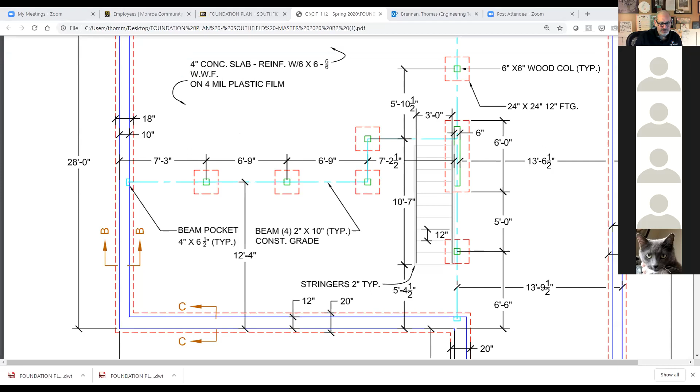Back to here, what we're going to do is put those in because that's something you want to know. Over here on the bottom, this one is going to go on the layer called section. Here's your leaders right here. First, let me see what kind of leader I'm talking about - standard. As I said, standard is the leader that's the larger one for the section. So I'm going to click here and go over and then down over to this point roughly here. Let me try again - go here, go over, and then down.

And you do that, and then at that point I would do the same thing - I'd go ahead and do a mirror here, and mirror this over so it does the exact same thing. I can go ahead and mirror this, going down here, picking a point, and mirroring this like this. I don't want to do that. So I got that - that's how you put that together.

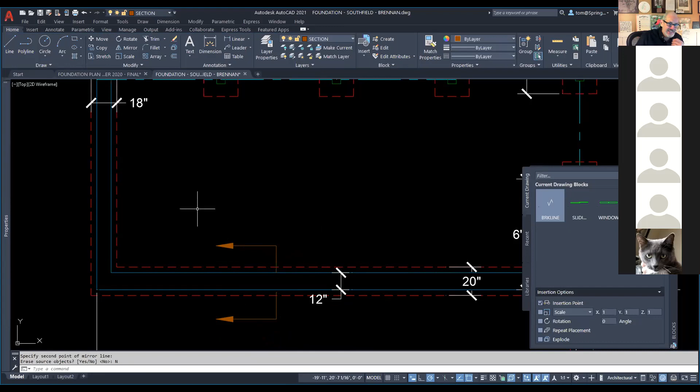Then I think this is just a regular text thing. Let me find out - maybe it is, maybe it isn't. I'll go here, let's see if I can make that C. I think that's going to be too big. Yeah, it's too big. So what I would do here is, if your text comes out too big like that, then check if I have a text style that covers that. Let me find out, I'm not sure if I do.

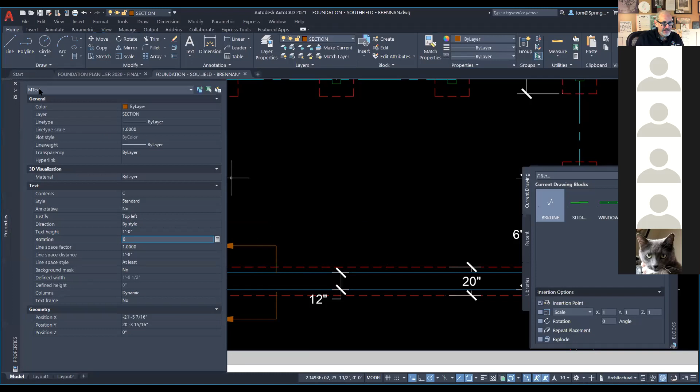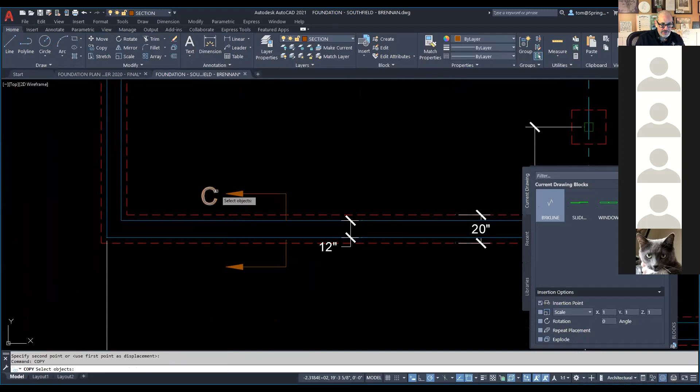I'll go to the properties. The text out here, instead of being 2 feet, I'm going to make it 1 foot. See if that's a little bit better. Okay, the 1 foot seems better. So you want to change that using your properties, which you guys have seen how to do. Then you just go ahead and copy that down - copy this from here, and we go from here down to there like that. Okay, and that's how you go ahead and put that in.

That is a leader. And then there's a smaller leader style here, so I'm going to show you this. If I go here and change the smaller leader style, which is right here - this is text styles. If you hold your cursor, it says text style. You hold your cursor here, it says dimension styles.

You hold your cursor here, it says a multi-leader style. So if I go here and click on the arrow, I can see these right down here, and I can change it to smaller, which is what I talked about. Using smaller, this is where I can put in this other notation, for instance, that says beam pocket.

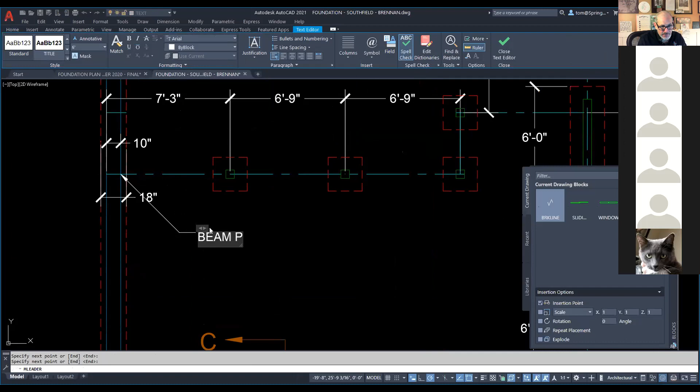Okay, so that's going to go on the text layer. And I'm going to put a leader in on this one. I didn't put my beam pocket in here, but I will eventually. So I'm just going to place this here, pull this down, and click. I'll move that other notation down in a minute. You click a couple points, hit your enter key, and then type in beam pocket like that. And that's how we go ahead and make that work.

And we do the same thing with this 4-inch concrete slab. So I go here, if I click a point here, I can click there and say 4-inch concrete slab. Let me try that again. Then I have to hit my enter key, then type 4-inch concrete slab like that. And then I've got that.

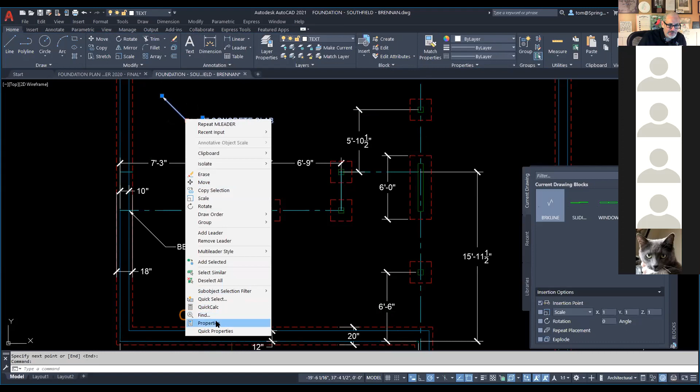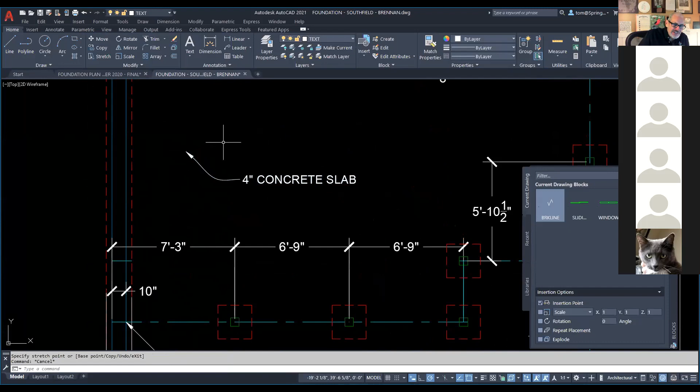So once I've got that, if I wanted to change that leader, I could click there and go to the properties. This is where I could actually change the actual leader type to spline. Now when I change it to spline, let's see what that lets me do. Hey, look at that, I can actually make it curvy now. So that's one thing you can do, you can go in there and just do this if you want to. Sometimes I get students that ask how do you do that - well, that's how. You right click on it and change the actual style from straight to spline. So that's something you guys can get into too.

The back wall would simply consist of adding one more line to give you the 8-inch wall, and then you'd insert your other elements right there. So we made that 8 inches. Since that's an 8-inch wall, we'd actually need one more wall 3 inches in to give us our 5 inches. So I'll go ahead and do that, and put one of these elements in, and that's going to be it for you guys. I think that's going to be good to do.

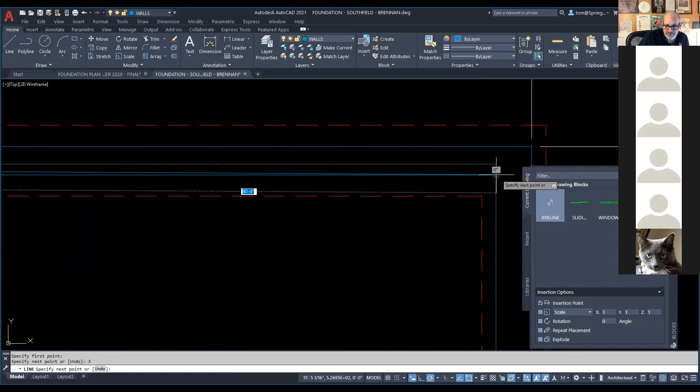So I'm going to go here, click here and go over 3. Then I'm going to go straight across over to here, touch it here, and pull it up. So when I've got that, that gives me my 8-inch wall and the other wall. And then I'd go ahead and put this in, and place this whatever the distance is, 7 feet from the edge. So I'll touch it here and type in 7 feet, and boom, there you have it. That is how you place those.

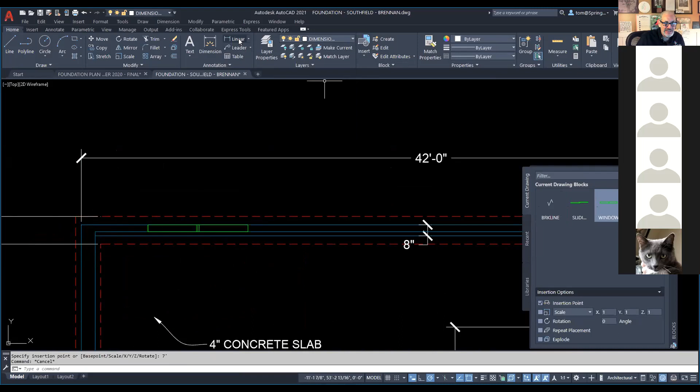Okay, so when that's all done, you just gotta do some cleanup, and that is pretty much it. So that is how we put that together. Anyway, that's how we do the foundation plan. I think that's everything, and then there's some text that goes on the bottom. Yeah, that's it, that's everything.